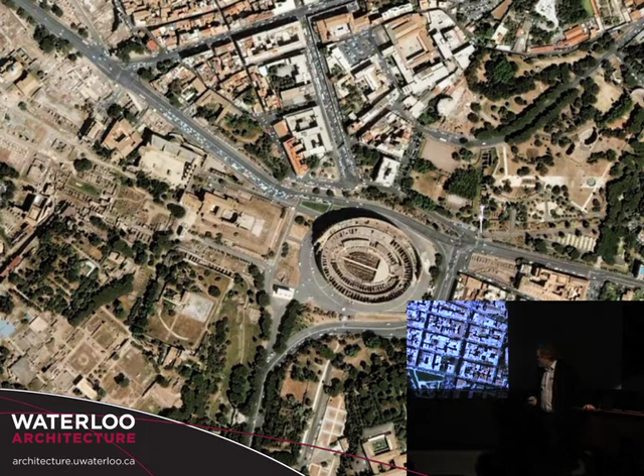Because my very first job was at Mathers and Haldenby, a now defunct firm which gave the genesis to the dean of the school, the director of the school, and it was one of the worst jobs I've had in my entire life. And I never wanted to work for a large practice again.

But 20 years ago, I found myself drawn to B&H through a series of sequences, and thought I'd be there for 3 months, and 20 years on, I'm still there. And Donald is right, I'm quite proud of the fact in some ways.

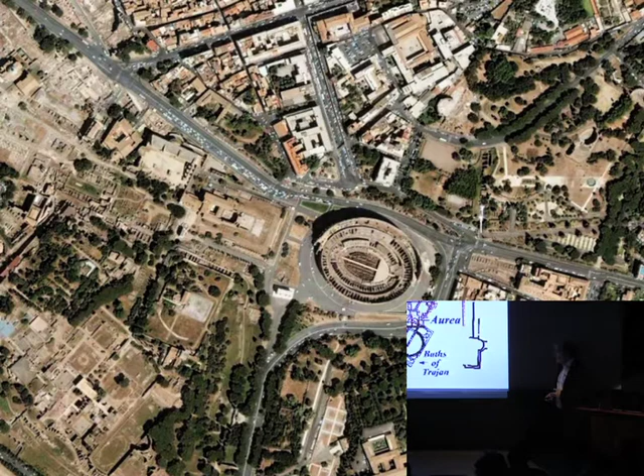And the reason for talking about Rome is that it was the first place where I kind of came to this weird understanding of the palimpsest of the modern city that dates back over 2,000 years.

Which one? You're okay? I think I'm okay.

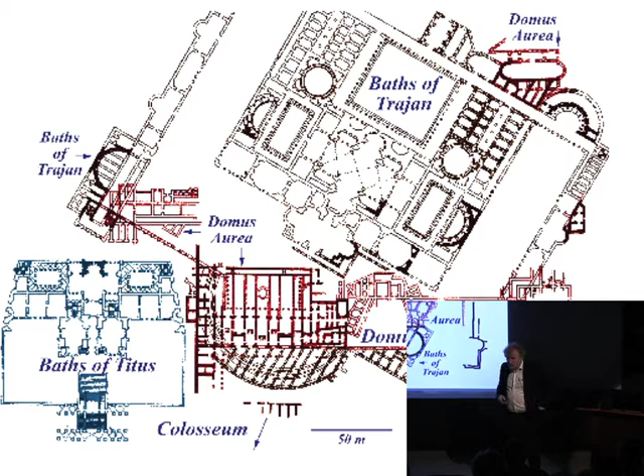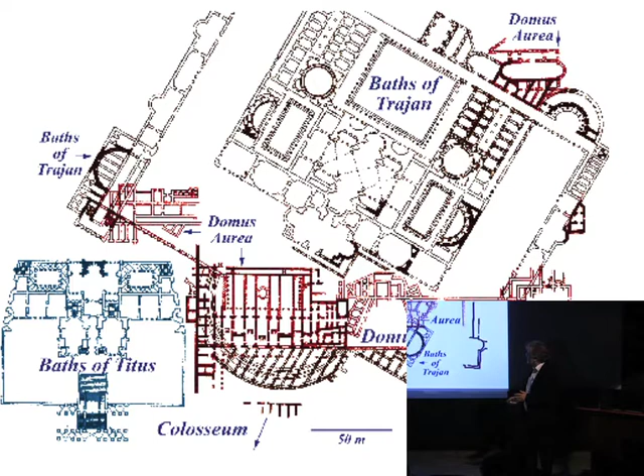Is that okay? Okay. And this is just the classic Domus Aurea, which I think is one of the great structures - the space itself is amazing and quite interesting, but to me the drawings of the thing are actually far more fundamental and interesting, and actually talk to the condition of the city.

As kind of a series of layers, and in this case layers of very, very large structures, beginning with the Domus Aurea, which was quite a bit larger than this whole thing, that 10 years after it's constructed is fully renovated and destroyed by Trajan, by a kind of marketplace that gets stuck on the top of it.

And I've always liked this drawing because it in fact is almost incomprehensible, but it shows the ability of architects to take a piece of structure, bury it fully underground, and then build the new program of construction on top of it by creating a brand new system of foundations that then the city gets instituted on up above that.

It was a perfect piece of Roman architecture, massive in its nature and its consistency of development. It was a seminal piece of structure at the time it was built, but then as time moves on, it gets completely consumed by the medieval city and taken over and becomes a refuge of the poor.

Fish markets get built into the base and around it, and it slowly sinks bit by bit into the layering of the city as it moves up.

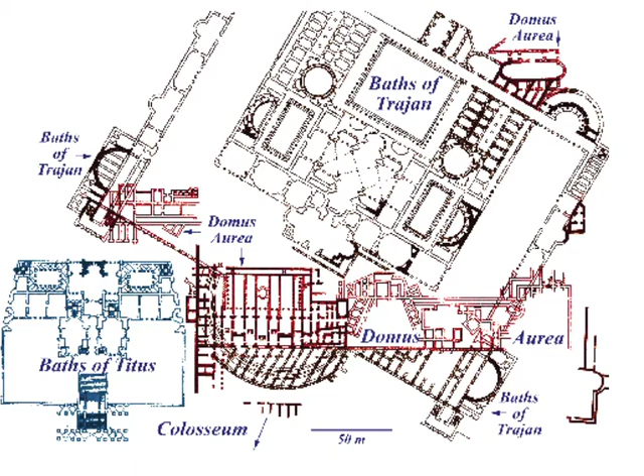Mussolini at some point tries to clean it up and turn it back into the kind of structure it is, but by that time it's already being completely consumed by the Barbarinis on one hand and then various apartments on the other. And then across the way at the Portico of Octavia, it's now consumed by a church, and the old city is almost a full level below grade.

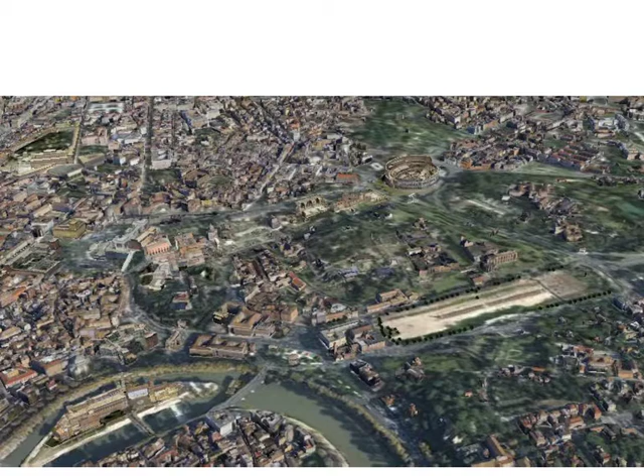But it just keeps on getting reinterpreted and redigested into the city. And in some ways, it simply can't go away.

So here it is in its genesis. Here it is now - it's basically become a hill town. The structure is still fully intact underneath this, with the city growing on top of it.

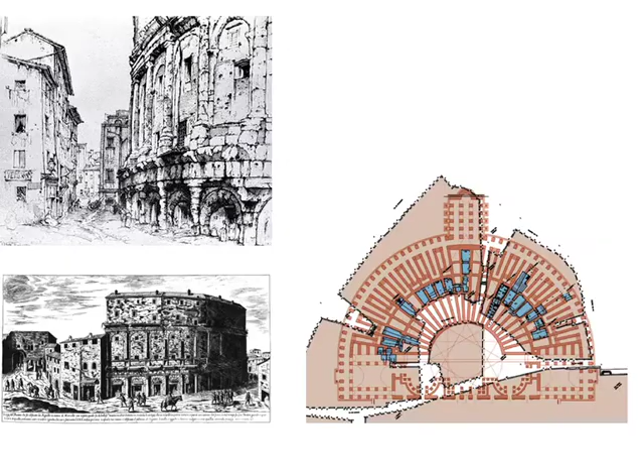And basically the landscape being reintegrated with that structure. For me, that's actually what the city is, and what gives me joy is walking around our city in Toronto and seeing these components that have been around for years. They keep getting reinterpreted, pulled apart, and put back together.

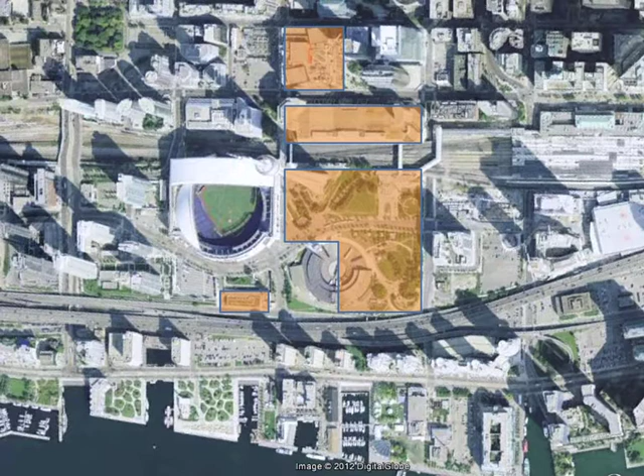But if we fast forward 10 years, we got involved with the Deep Lake Water Cooling project. This turns out to be one of those great pieces of infrastructure in the city that almost nobody knows about. It starts with the problem in Toronto of lousy drinking water, wanting to add capacity to the drinking water system.

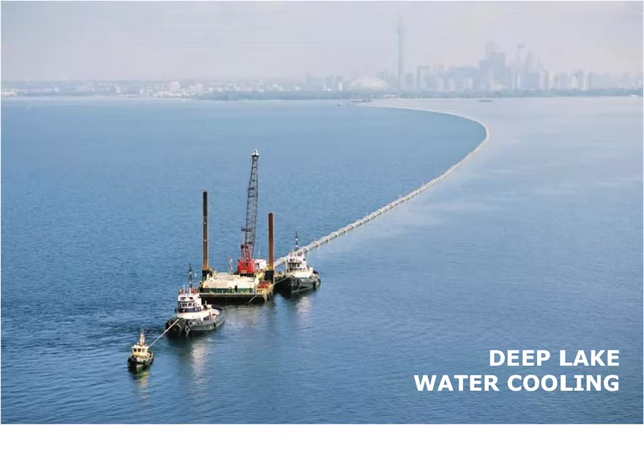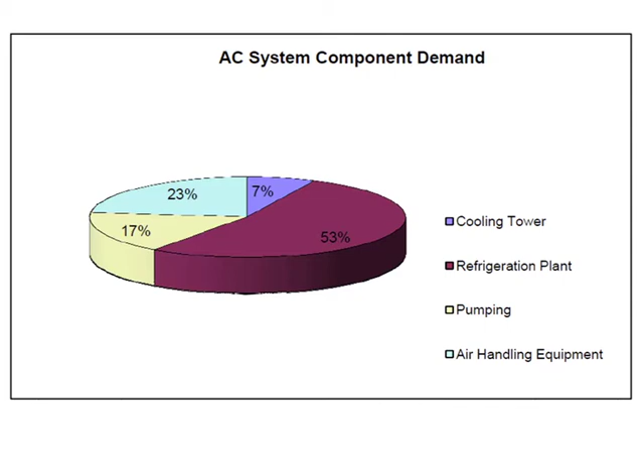At the same time, a group of engineers came along and said there's a real thing we can do here to reduce refrigeration plant energy loads in the downtown core of the city by taking this drinking water and sucking some of the energy out of it.

The project itself consists of three 4-kilometer lines that go out into the water. It hugs the base of the shoreline and goes fully out that 4 kilometers until it can reach water that doesn't stratify at the base of Lake Ontario. It stays at a consistent 4 degrees Celsius.

So you bring this water in, and it comes into the Toronto Island pumping station, filtration station, which itself is an old structure that's been there forever. It hadn't been used for some 25 years, but it's now being fully reinstated in the city with new machinery to filter that water.

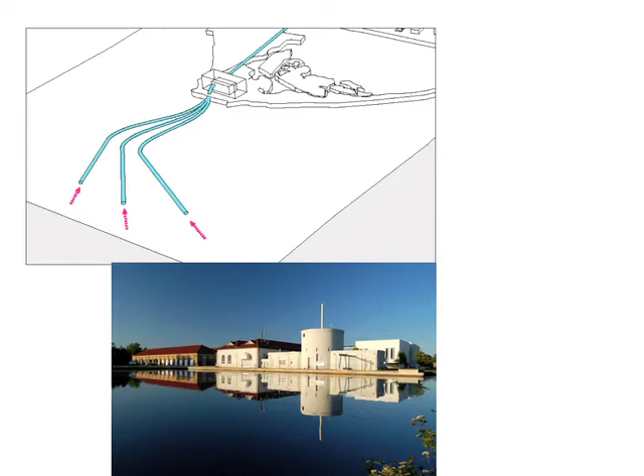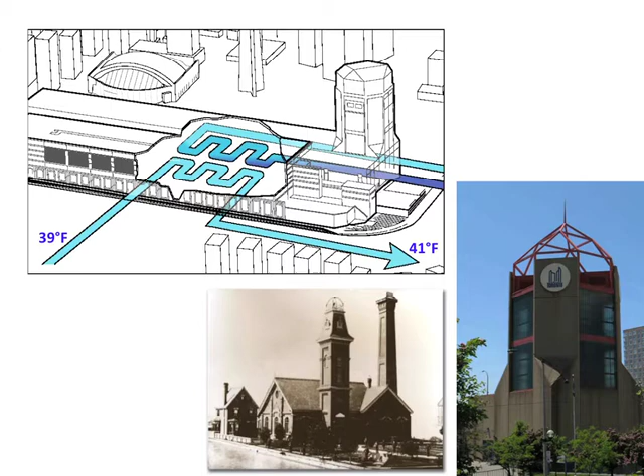That water comes into the John Street pumping station, which B plus H produced. This was the original structure that sat where Skydome was, and then this is the new facility.

Within that space, we bring in the water at 39 degrees and take out basically about 2 degrees off of that to generate almost 40,000 tons worth of cooling. Below this system, below grade, there's this massive room that you will never see.

No one's allowed to go in there because, of course, it's a strategic asset. There's this guy here - you can see he would stand about this high.

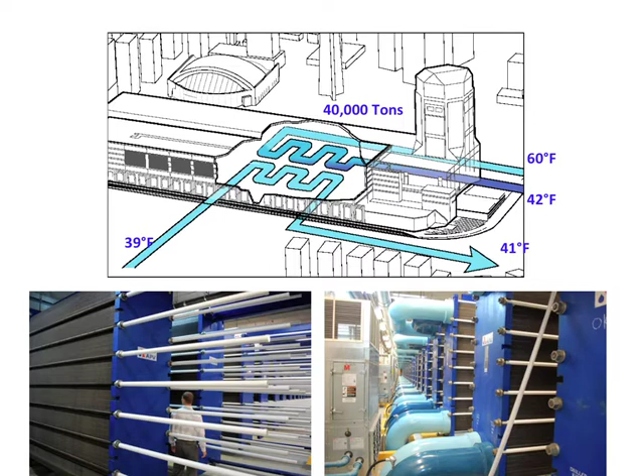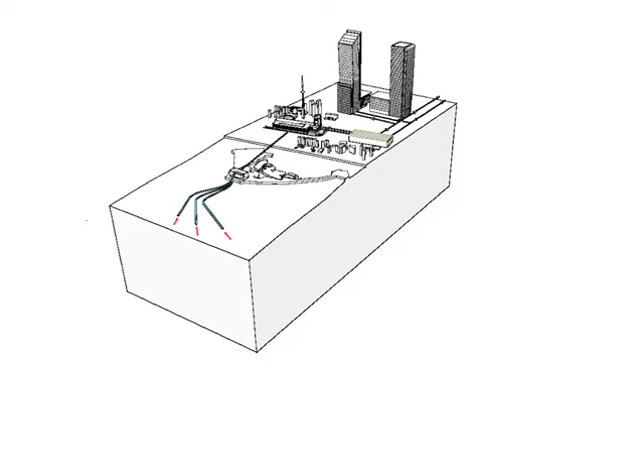All the drinking water for downtown Toronto comes through this system, and a piece of it gets knocked off to generate cooling. That then goes and sits in the cistern on the ramp for the Metro Toronto Convention Center, where it's combined with incoming coolant and pushed out to the rest of the city, uptown to the core and all the way up to Queen's Park, which you can see here.

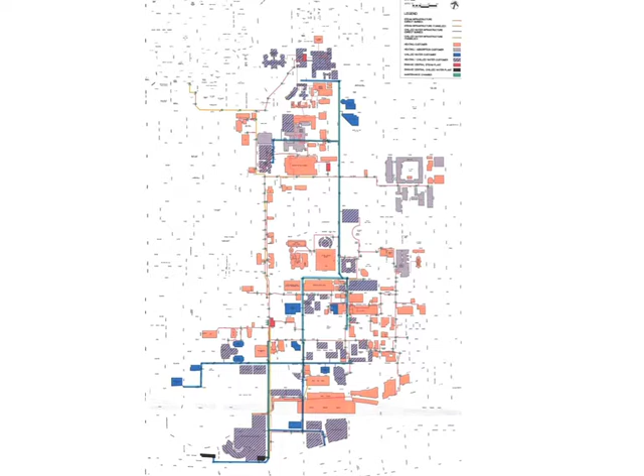So this is the kind of continuous system, and it has quite a number of buildings on it, in particular the TD Centre, which we've just put on there, and the Royal Bank Centre, which I'm going to talk about for a second.

To me, what's extraordinary about that is it's a massive system leveraging a component of the city, drinking water, to generate something sustainable, but it's not the way we typically think about sustainability, which is small and local. It's actually large and systemic.

It's also a thing that architects do and have to be part of, coordinating consultants and so on, which generally is completely unsung and kind of disappears into the background of our profession. So I'm just going to quickly talk about the RBC Centre as the first building in a kind of transformation of the office building in the core.

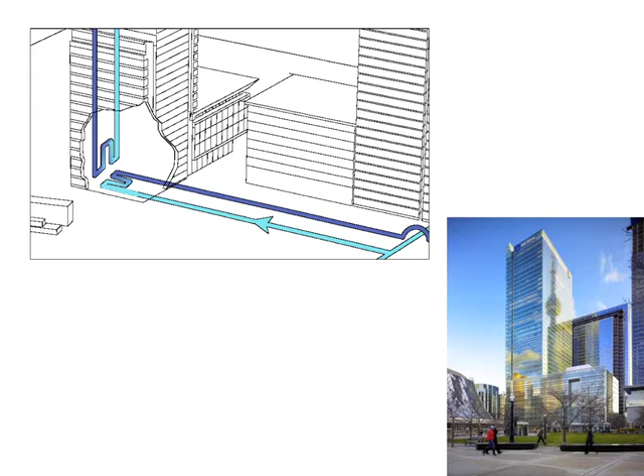So the Enwave system runs coolant into the RBC Centre, which is the largest LEED Gold certified building in Canada right now, and we'll talk about that in a moment. It has all the classic components. By the way, this was developed with Dermot Sweeny, who has a sustainability practice for working on these projects.

It combines several intense sustainable components, including displacement ventilation, which uses natural convection currents from equipment and people to drive fresh air up towards the ceiling so it can be drawn off at the top, meaning the air is much cleaner instead of trying to push dirty air down. Also light shelves, high quality glazing systems, perimeter heating, and so on.

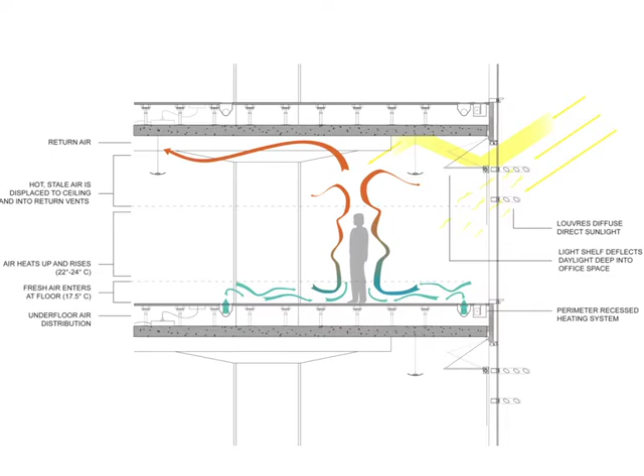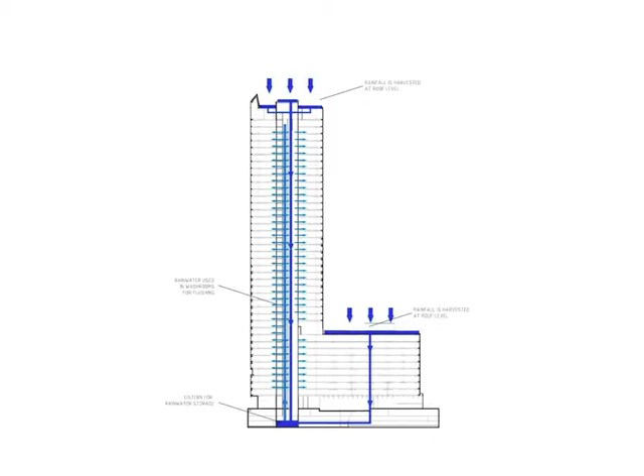It harvests rainwater so that all the lower 10 floors are fully flushed by rainwater, sequestered on these two rooftops, as well as using that water for irrigation systems. And then, of course, the chilling system from the Enwave plant reduces the energy load significantly for this building.

So this is the section we developed for the building, with sunshades that reduce direct solar glare, automated roller blinds and light shelves that drive daylight further into the space, and indirect lighting on the ceiling and exposed concrete systems.

Now, what's interesting about this to me - it's LEED Gold and so on, but in some ways it just shows how far we are from being a sustainable environment, in that it's floor-to-ceiling glass on all four elevations. So in some ways it's kind of bogus.

Nonetheless, this is how marketing goes, and there was no point in even having an argument about putting more solid wall into this - this is simply what they wanted.

And the LEED Gold designation - the building does unquestionably use much less energy than an equivalent building without sustainable strategies, uses much less water, et cetera. It's doing its job, but in terms of going the next step, it's certainly a long way from it.

And I think we're going to see another few floor-to-ceiling glass buildings in Toronto, and then it's going to be mandated out, legislated out as a solution.

One of the biggest problems they have with this project is simply that lawyers come in to rent the space and say, 'We love the view, we just love the view, but I really want a wood coffered ceiling.' So anyway, these are the things you have to deal with in these spaces.

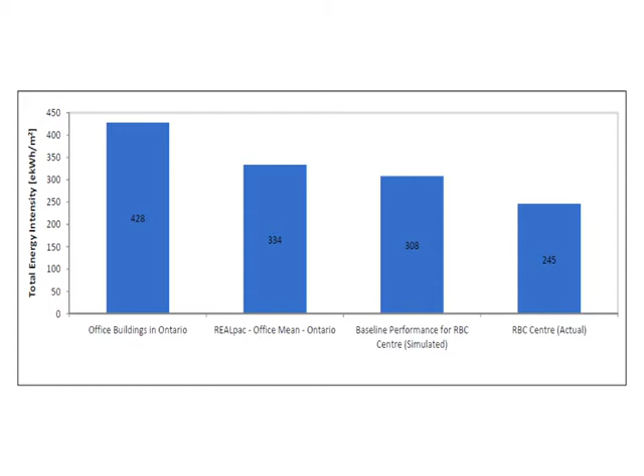I'm just going to flick past this, but the interesting thing about this building is that we try to model all of our energy use on our buildings, and this is the baseline performance in the simulation at 308 equivalent kilowatt hours per square metre - and it's actually performing at 245, so it's working incredibly well. But what it's done is set the standard in the city now for what an office building should be.

So now we have the Price Waterhouse Tower that's come on stream, TELUS has come on stream, and Oxford's about to build a platinum rated building in downtown Toronto.

So it now becomes the marketing tool: it's got to be LEED certified, which means the rest of downtown, including First Canadian Place and Toronto Dominion, need to up their game to meet that requirement. Toronto has no history of retrofitting buildings, really. So for us, when we started down this avenue, we started thinking about other areas where you can see these kinds of retrofits going on.

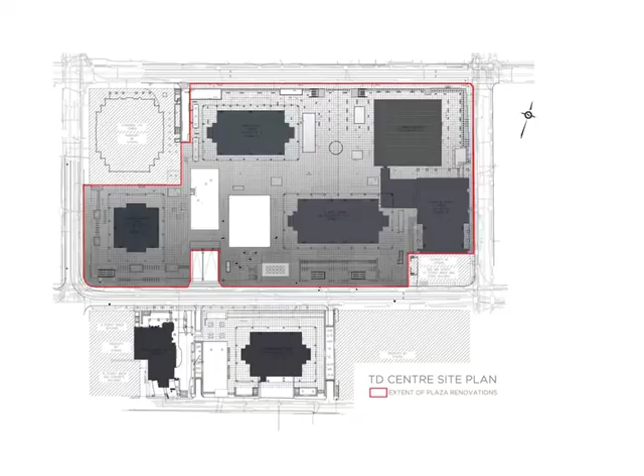And then we have 2 other towers built alongside it of varying degrees of quality. This one is the 3rd tower that was built—we'll talk about that in a second. But the biggest architectural expression of the building is the exposed structure on the outside, which isn't actually structural, but the expression of that structure, and the floor-to-ceiling glass running up the building with the bronze tint to it.

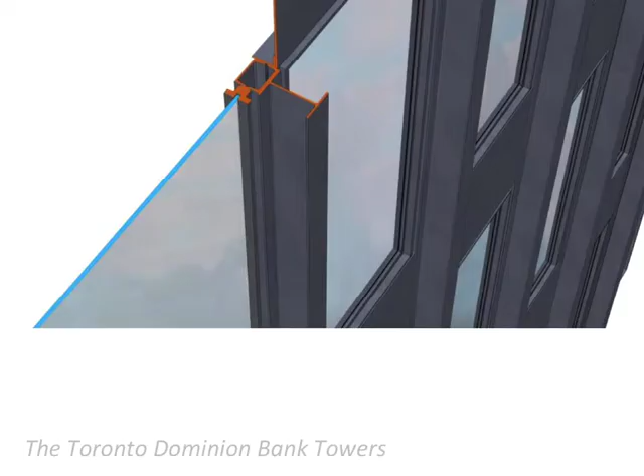Now, the color is really off here, but you can see the structure's gotten quite run down—all the sealants are popping out of it. This color is supposed to be jet black, and so although we still look at the building and see it as black, it's actually battleship gray. It has this amazingly crazy notion about how to build, and it brings for me the sense of how confident we were in our time. This was the most extraordinary technology of its time, and everybody thought it was going to last forever, et cetera.

But it's single glazed. This is steel bar stock for the window stops. These are two steel channels stuck together, and then a steel I-beam section stuck on the outside of that—this is outside, this is inside. So it's basically like a perfect radiator; it just sucks the energy out, whether it's cold coming in or heat going out. There's no insulation whatsoever in the system—there's a teensy-weensy bit in the spandrel panel, but otherwise it's basically like sitting outside.

So we face this dilemma that at some point Cadillac decided to transform the building, as pieces of this were slowly rotting out and rusting out, and it just came time to deal with it. In this case, the architect's job is to be non-existent, to do something where nobody sees it, including the tenants inside the building, so that somehow it gets transformed and at the end everybody goes, oh, it's a Mies building.

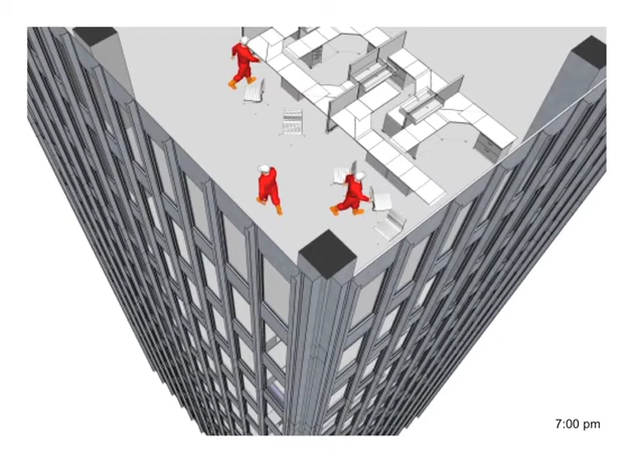It begins with a whole program of dealing with lawyers and so on, so that at 7 p.m. they pack up their stuff in boxes. The guys come in and move everything away from the window, one bay at a time, bring down the swing stage, and this poor guy has to be on the outside digging gaskets out of the building and grinding pieces off. The glass gets removed to the elevator from the inside, then brought in and replaced. The furniture goes back at 7 a.m., and happy people return having noticed nothing changed except for better windows and no induction units.

And it sort of worked that way - amazingly enough, there were only about 17 floors unoccupied in the building at a time. So here you can see the opening in the window and the guys working up on the platform.

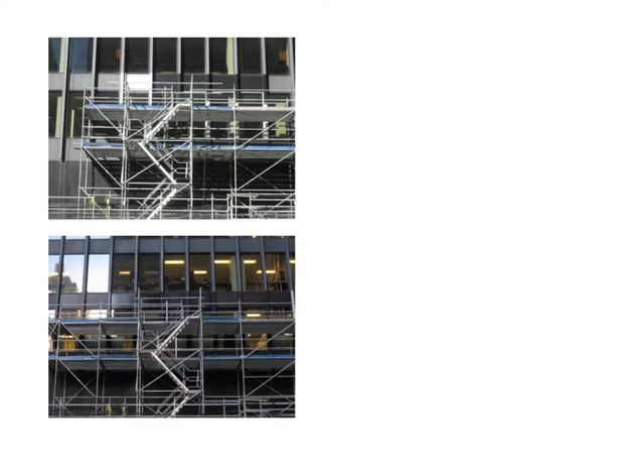And then we had to develop this - you can see here the gray existing paint, and these are new programs for studying the repainting of things. The building is painted with this lead-based paint, which is just fantastic stuff. They used to use it on bridges. Technically it doesn't really dry, but it's as toxic as it comes - extremely toxic. So it's technically illegal to use now.

And so the final result is floor-to-ceiling glass, in terms of the effect to the client. Now it's actually fully competitive with the RBC tower, and it's a building that was built in 1969. Its energy load is not quite as good as RBC, but it's right up there, and it's now rated a LEED Gold EBOM building. So it's actually being transformed dramatically from its former space to what it is now.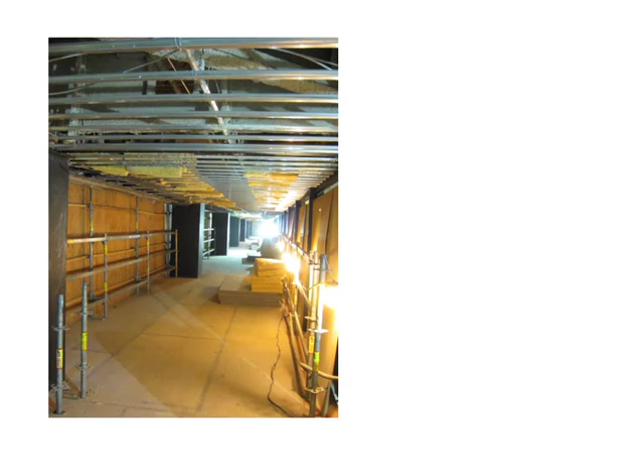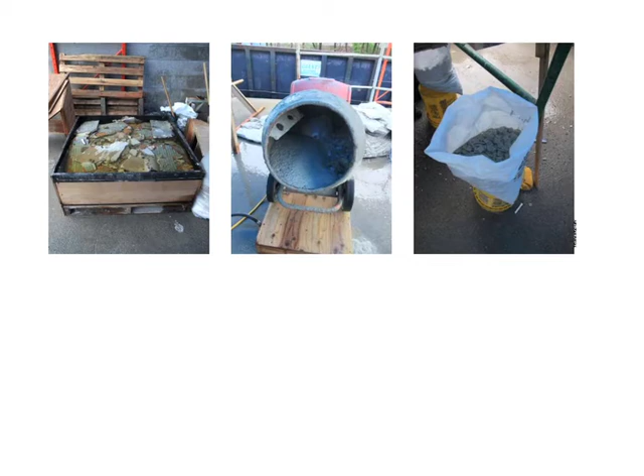We removed all of the mosaic tile from the ceiling, which was damaged in spots. Then we took all that mosaic tile and tore it apart into individual pieces so we could tumble it. This was all done on site. Tumbling cleans all the material off of it—you can see it here before it's tumbled—and then we create new panels by mixing in about 20% new glass tiles.

We couldn't replace the Mies tile with the original—it didn't exist any longer—so we mixed in another 20% of tile. Again, this was all done on site and replaced in the ceiling. We also removed all the various junky programs that got put in over the years and replaced the grills and so on, so it's very crisp now.

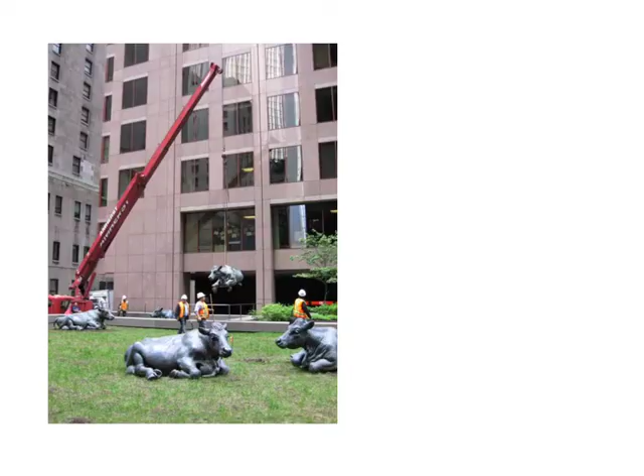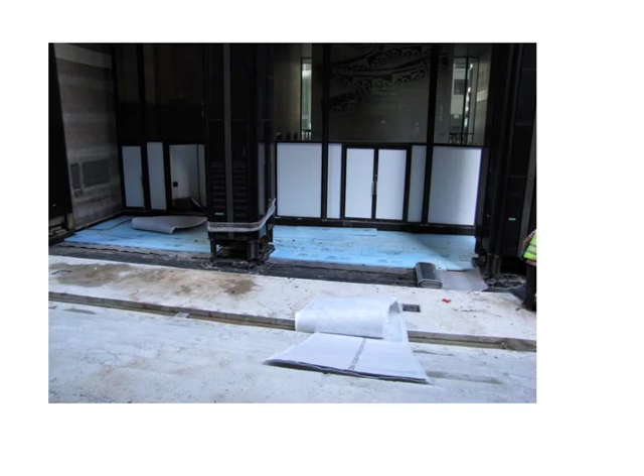It's also energy efficient. The program included tearing apart the plaza—removing the cows, ripping everything up. This was completely uninsulated, so we got in there and replaced it all with modern waterproofing, then new insulation, then a new tile surface on top of that.

That also helps because the whole underground layer of this building is entirely a shopping mall, so it improves again the energy performance of the mall.

As a kind of finale, Cadillac Fairview asked us to look at turning this into a green roof. It's funny because every developer needs a symbol of sustainability, and the common symbol is photovoltaics, which are total nonsense in that they only work if you have a lot of input, like tariffs put into them, and they just don't deliver the energy.

If you took all the millions of dollars spent on photovoltaics and spent it on your envelope instead, you'd have real, direct benefit for your building. But your envelope isn't sexy, while photovoltaics look great to stand in front of—they're purple and terrific. This is a standard thing in my practice: everybody wants photovoltaics in their building. You'll see in a second, we had to do a whole study on putting photovoltaics on the facade of a white icon in downtown Toronto, First Canadian Place.

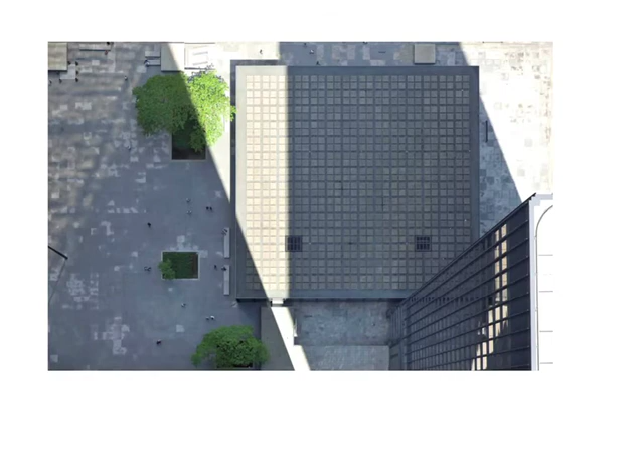But green roofs are something everybody can see, so we did this study for putting a green roof on top of the banking pavilion. It starts with a multicolored thing, which many of us in the office found appalling, but you have to go through these things. Fortunately, there isn't enough sunlight here to promote colored flowers, so we ended up with a type of palletized grass, not sedum, and that program is now finished.

This is still a rendering, but it basically looks like this. It's the only thing that kind of breaks with the Mies tradition of something actually growing on your building, but anyhow, it seems to be working.

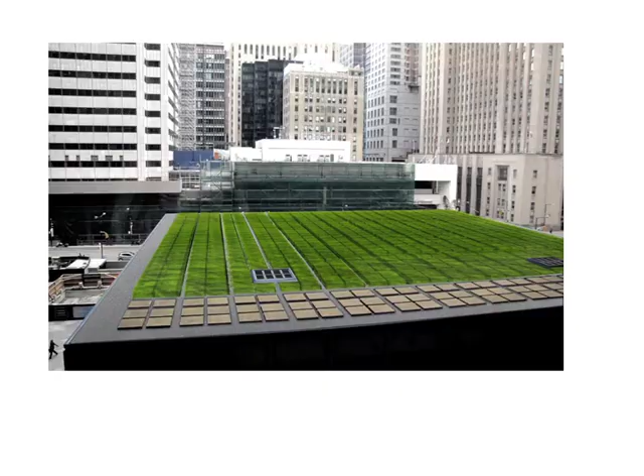I think this is the perfect idea of a place where you don't want to mess with it—it's got to be perfect in its reconstitution, regeneration and transformation, bringing it back into its relationship to the city and making it competitive in the marketplace. Weirdly, even though this place is listed, Cadillac often talks about tearing it down and building something in its place, so it's important that we keep these structures interpreted and germane. Otherwise, they tend to disappear.

At the same time, we had the great good fortune of working across the street, and this is sort of an interesting photograph.

It's an old image of downtown Toronto. This is one of the first large buildings B+H did, and we've been working on these structures since 1969, or 67. Across the street, we started work on First Canadian Place in 1973. It opened around 76, 77, and it's been a lifelong relationship with the building as it's been bought and sold by various developers. We've been working on it ever since. It's 2 million square feet of legacy for us, and we've had a love-hate affair with the building since it was built.

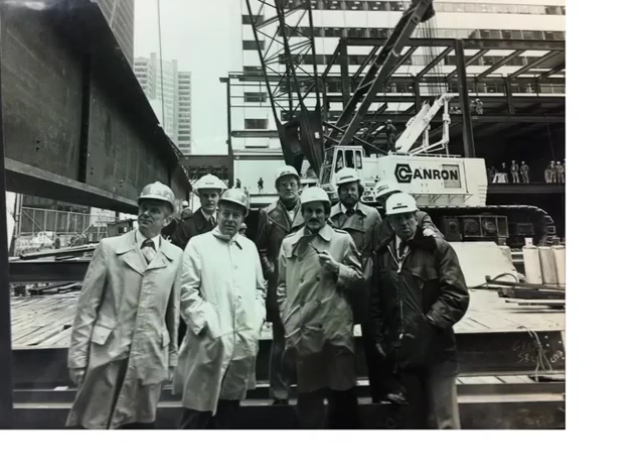You can see here that everything white on the building is in fact steel, and it was clad top to bottom in Carrara marble imported from Italy. The marble panels are 1 3/4 inches thick. I want to point out this bit of legacy - this is Tony Alcazar, a senior partner in our office who's now 75 and still works in the office, putting up the last piece. Look at all these boys with their pipes and so on.

I keep saying we, but it actually is we - Liz and I - and these things require huge teams that do the analysis on these buildings and so on.

This team was called in to work on the building because one of the panels, a number of years ago, fell off the building and dropped 40 stories to the podium below, thankfully. It exploded, sending marble all over the place along with gravel from the roof. All the streets surrounding it were closed while people figured out what had happened.

What had happened was that the entire thing had gotten old and musty, and we had this process taking effect called hydrothermal hysteresis, wherein the marble, which is porous and absorbs water, has its front face dry out while its back face doesn't, so it starts cupping. It's just like a wood floor in a basement - it develops a memory and doesn't go back. Over the years it gets slightly worse, until in some cases we had bending out of plane of almost an inch, which in a 1 3/4 inch material is extraordinary, putting incredible stress on the pintles and connection systems.

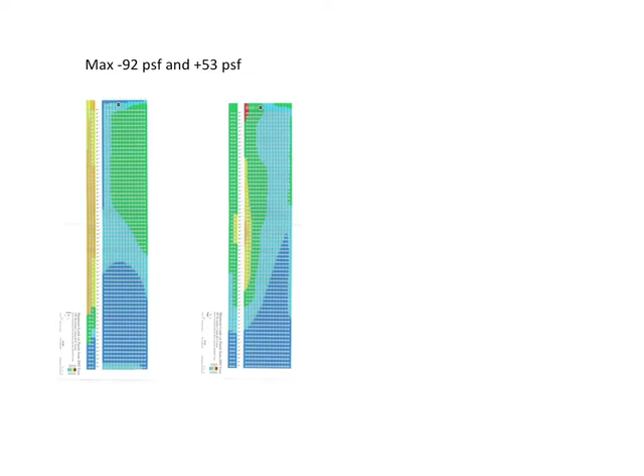I want to show this diagram from the late 70s showing wind loads on the building. Back then the effect of wind loads on buildings was poorly understood, but you can see the hot spot here - this is where the major wind loading occurs, at the top of the building. As the city gets built around this tower, we had to do a new wind study to see what was going on, and it changes the velocities dramatically around the building.

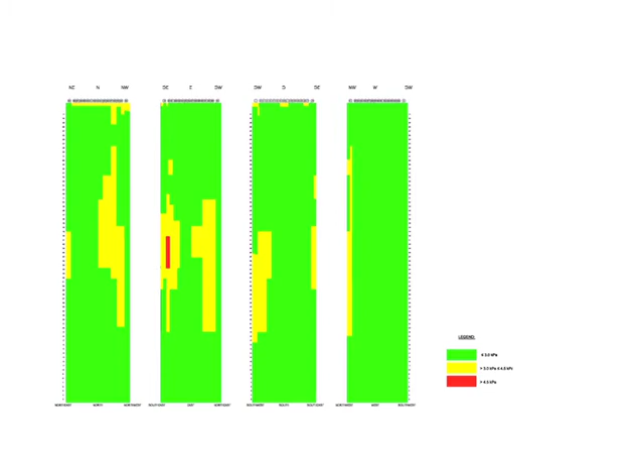It starts creating kind of Venturi effects between the towers, and the highest speed wind velocities start up here and drop down to here, and you get this phenomenon called vortex shedding, where the wind peels away from the corners. This is exactly where the panel fell off of the building, so the model actually predicted this would happen. When we went to redo all the cladding, we reinforced all these areas in yellow to deal with higher loads from the increased density around the building.

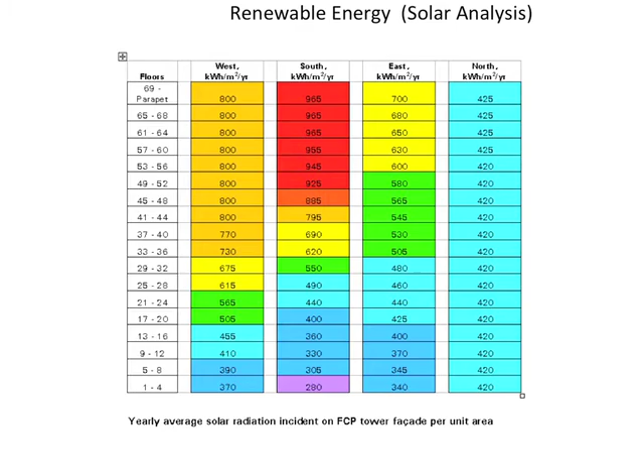As part of the study, we looked at methodologies of construction, because in this case everything had to be done on the outside of the building, as opposed to the TD from the inside. This is the Aon building in Chicago, also an Edward Durell Stone building, which started failing about 7 years after it opened, and they had to reclad it all from the outside. The pieces of marble were raining on the streets below, and they had to close most of the streets before they started this process.

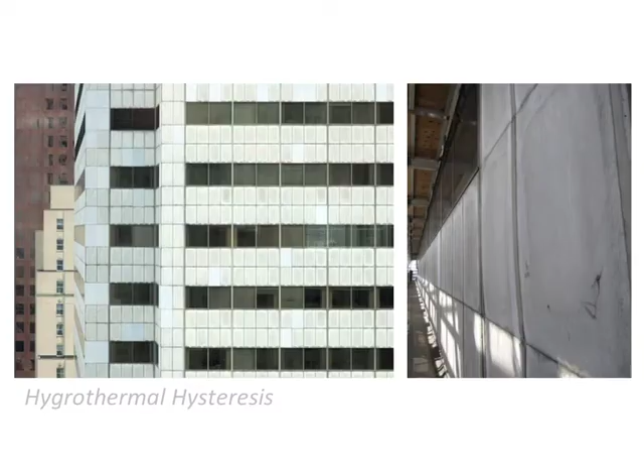Taking all that information and understanding what we had to do technically in terms of reinforcing the facade, we then looked at what the new suit is, which is the design exercise for the project. This is just showing up close the marble situation.

The existing building has panels at every 10 feet, 10 feet by about 8 feet, divided in 4. So each panel is 2 feet 5 inches by 4 feet by 1.75 inch marble, so you can imagine a very heavy object.

You can see all of the sealants leaching into that marble, in particular where the pintles are at the base, where you've got water wicking out at the bottom of the system and bringing old silicone out to the surface and wicking back into the marble. Here you can see the problems of the thing bent out of plane.

The first thing that happened after the piece fell off is they put these rubber bands that ran all the way up the building, embedded in silicone, to try and keep everything intact so things wouldn't fall off. So the building was looking really ugly, kind of like a university student's basement apartment shower or something.

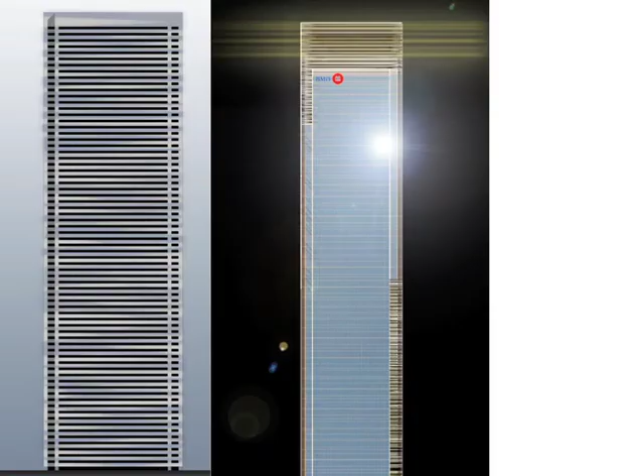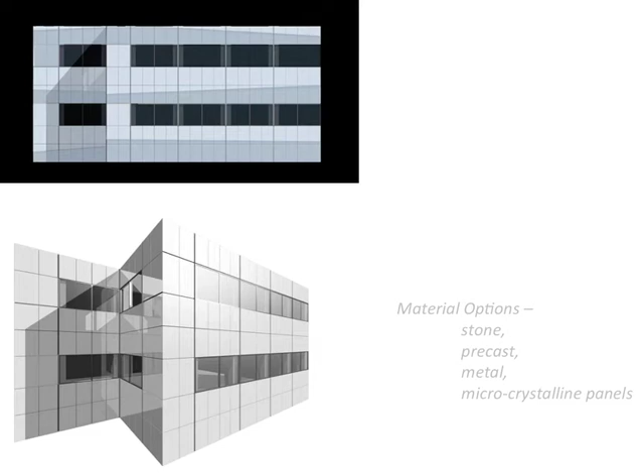As part of the study, we looked at piles of different ideas about how to deal with the facade, from full recladding, reoccupying the corners, putting office space into the corners, to recladding with various materials. Maybe it just stays white. Can we do something with different material options: stone, precast, metal, microcrystalline panels, or frit patterns into the glass that change the apparent angularity of the building and hype up the form. Could it be blue? Could it be zebra?

These are the sort of exercises you have to go through, in particular with clients who are so nervous about the amount of money they're spending, and the question of how are they going to know it's new if you just make it white. This is a question that comes up over and over again.

Ultimately, what we decided was that it was really important that the building stay white. That's the icon, that's the place it occupies in the city - the white tower, the black tower - it can't be any other color than white. So how do you transform it but give it a new aspect, new character, and amp up its sustainable components?

So this is the final constitution of the building, with a slight adjustment to the crown on top, keeping the building white, but now replacing the marble with glass all the way up. But then taking the corners—and it's funny, because I never liked the corners, even as a kid before I was an architect, I always thought they were kind of ugly and dumpy. So we got the opportunity to take these and almost make them more like 4 panels attached to the tower, instead of a homogeneous cruciform envelope. So we made the corners of bronze glass in that case.

So here's the assembly as it existed, with its 8 panels of marble and existing strips of windows, which we kept. The glazing was actually in very good shape, and over the years about 25 to 30% of it has been replaced anyhow, as it aged, or broke, or the seals broke in the system.

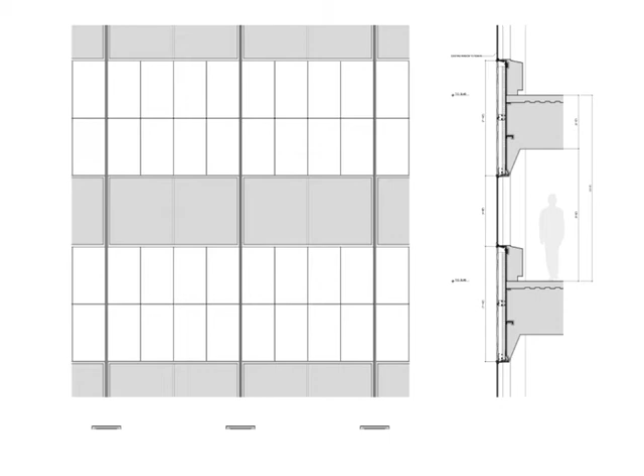So we went with this idea of replacing all the stone with a panel of glass that's about 8 feet by 10 feet—just to put it in context, it's a huge piece of glass, almost the size of this image. And then to replace all of the curtain track as well, and all of the seals and gaskets and the flashing.

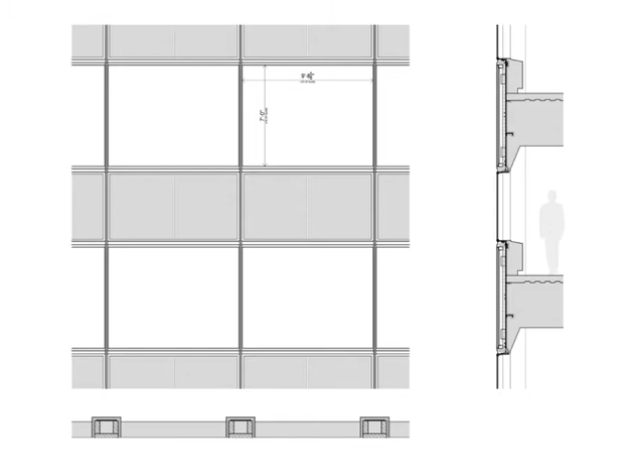So this is the kind of final decision about how it should look. We have the glass panels, the darkened bronze corner, and then the issue becomes how to actually make that happen.

So you can see here, it's very subtle, but we made this decision to create some texture on the surface of the building by taking the technology of glass. From a structural point of view, we ended up laminating 3 layers of quarter-inch glass into the system. Then we decided to put a frit pattern into what's referred to as layer 2, or surface 2, and an opacifier at surface 5. So you have about a quarter inch of depth there to create some shadow in that plane.

And once we decided that, it got into this thing—this is one of the mock-ups, and you can see that effect, the shadow line that starts to get created within that depth of about a quarter of an inch on the building. It's very subtle. But then it became issues of how to construct that.

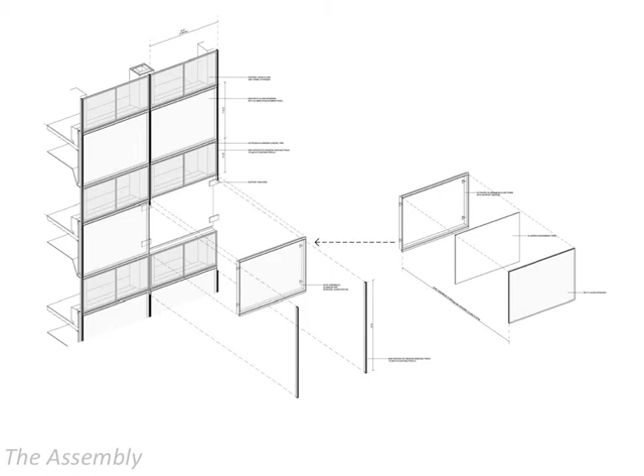So you can see here, that's the idea of how you take apart the panel—just put 2 gravity anchors on the top and lateral on the bottom, and you'll see how that works in a second. And then this layer of three layers of glass onto a metal frame. That's the kind of system there, and we'll talk about that a little more in a second.

But then we got into this thing of what that frit pattern should look like. Since we now have like 6 surfaces to play with, we started fooling around with what you could do in those 3 layers and that depth. One of the things we thought was: what would happen if you had 2 layers of frit, put them against each other, and started rotating them—which gets you into these moire patterns, which you can twist and turn and stop at whatever point you want.

But at some point that became kind of arbitrary, so we thought we'd go back and look at the work of Edward Durell Stone, in particular the way he did these screens and so on, and then settled on this idea of how he did the screens later in life, where they were more triangular patterns he used in several of his works.

So then we started working with the triangular patterns, and this was actually when the job was fun—we gave out kits to all of our clients with 2 layers of these frit patterns that they sat there and rotated. It's great to see guys in suits do these things.

At some point it all becomes a little too fussy, so we settled on the idea that it should just be a simple triangular pattern, but with a kind of depth to it. So this is the final idea for that piece.

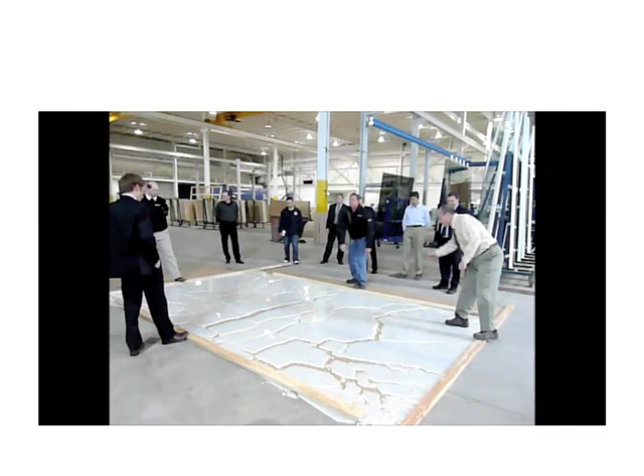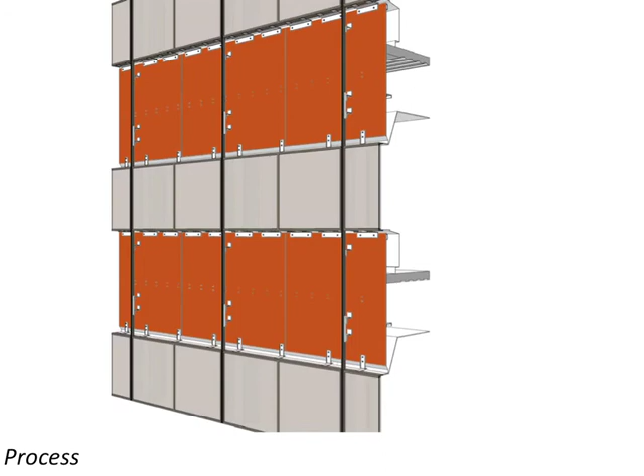All that said, this thing is going on with balconies in downtown Toronto. The weird thing is they performed exactly the way they were supposed to, but now everybody's scared of balconies with glass. Now they're saying they're going to laminate the glass, so you've got sheets of this stuff all broken up like this, but attached to a chunk of plastic. So it's a question of what's better - a chunk of plastic and glass falling on you, or a little piece of glass. That's a whole other debate.

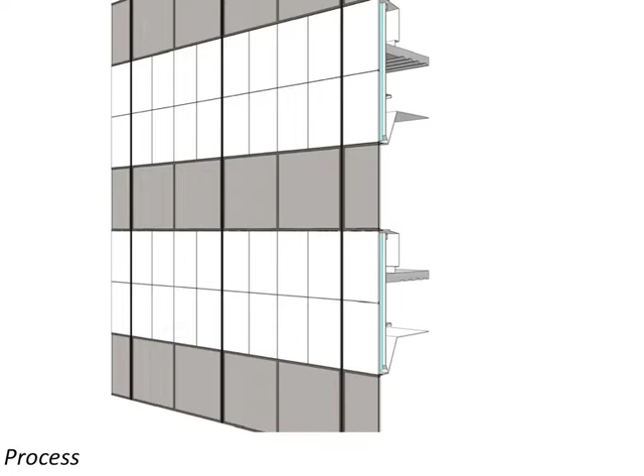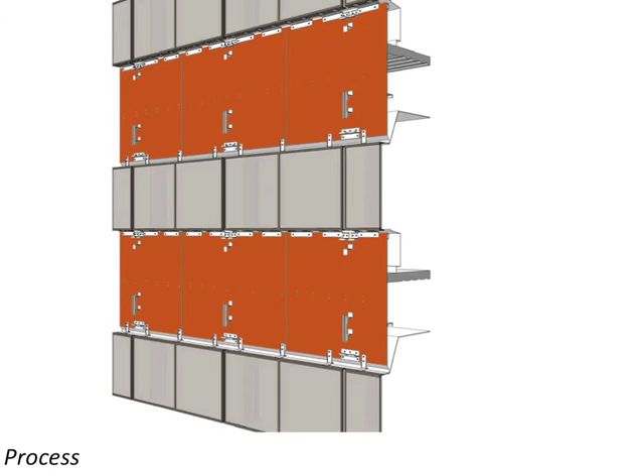So this is the process. We start with the system, remove the stone, remove all the insulation that's in there, burn off all the clips that support that stone, and remove the window washing track, then reinstitute new clips for the window washing track, new insulation - and one thing missing here is to go back and caulk all these pieces, replace anything damaged, replace all the flashings, etc., replace the insulation. The new panels come in, new trim goes on, and it's finished.

That all looks very simple, but of course that's just the design. What was interesting for us, and quite rare for an architect to be involved in, is that the whole process had to happen on the outside of the building. So we were directly involved with the logistics of construction, which architects usually run away from for liability issues. But in this case, the climber had to be fully integrated with the design.

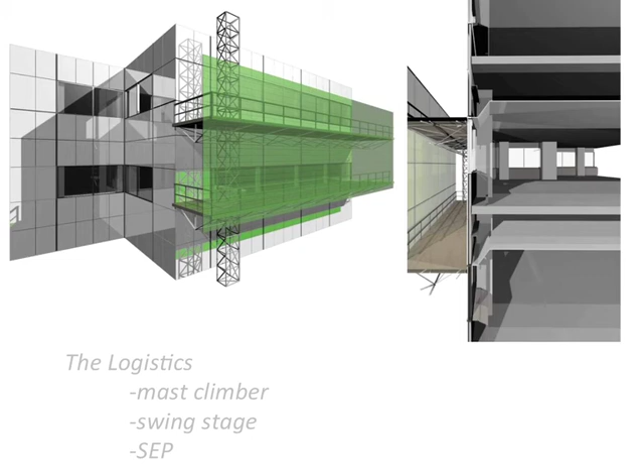As it moved down the building, it had to be clipped into the building, then unclipped, then clipped in again and unclipped. So we had the opportunity to work directly with a group out of New York who built the system, and to integrate it into the assembly for the building.

It starts with three layers of structure. On the top layer is where the glass is put in. The middle layer is the structure for attaching it to the building. The lower layer is for remediation, removal of the stone. Each truss relates to the column and the 10-foot module of the structure, and it has skates on the top and bottom, which I'll show in a moment, that integrate into that window washing track - that's where the system is hoisted up and down.

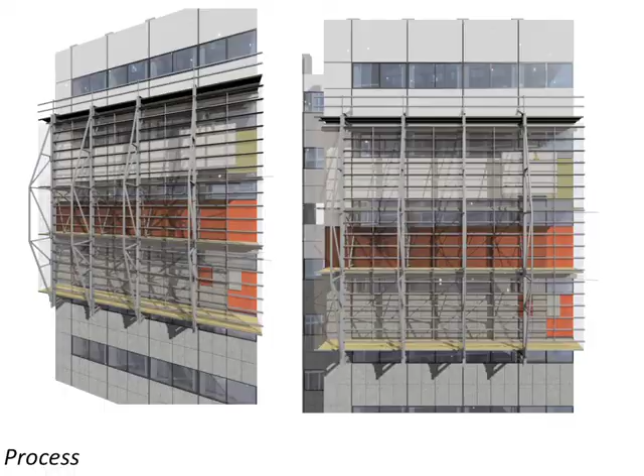In fact, what happens is we have 57 winches on the roof. That's the track, the skate goes in here and here - that's the structural component, structural level, glass platform and stone platform. So the platform is lowered a floor with the winches. The cable runs down in the window washing track and connects in there, and then it's lowered down, with nobody on the platform when it's lowered.

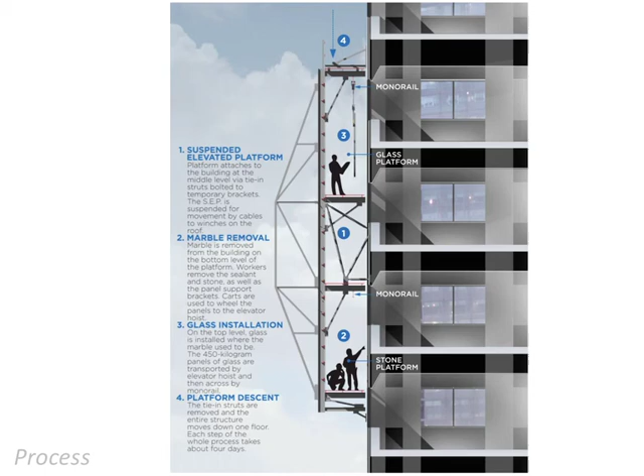And then it's bolted into the steel assembly, and at that point people can come back onto the platform and move things around. So no weight is borne on the winches - it's actually on the structure of the building. So it's an incredibly safe platform and allows for a huge amount of movement of large material.

This is actually interesting to me - this is an architect's drawing. It looks a bit like a shop drawing, but this is our interpretation of the structural system, how it's going to bolt into the assembly, how the skate attaches in, and how it's going to work on its way down. It's interpreted into a shop drawing.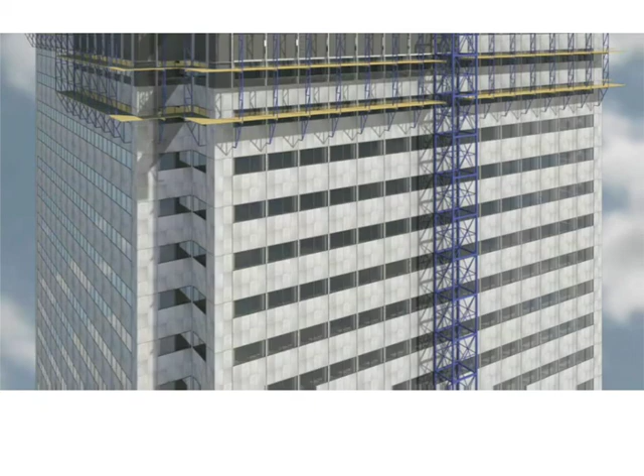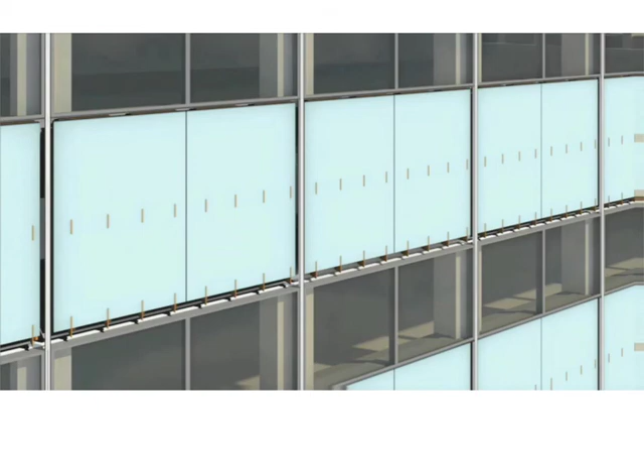So this is assembly, it's coming down. It moves into place, remediation happens on the lower level, and then the new glass is installed. This is just a view of the process: remove the stone, remove the insulation, cut off all the existing hangers.

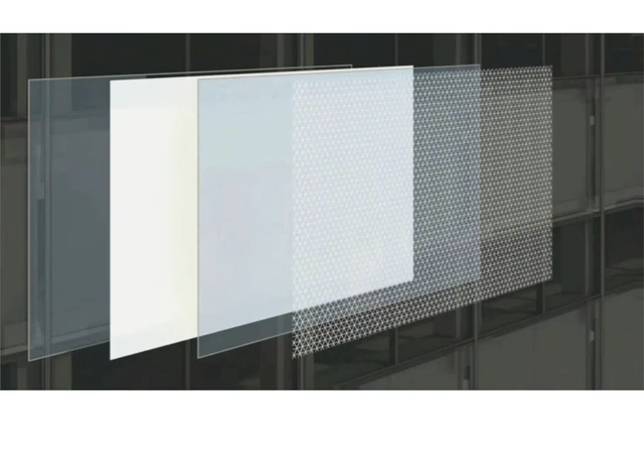New insulation, new Blueskin, new hangers. And then this is the glass assembly, which starts with a clear glass, an opacifier, another sheet of clear glass, the frit pattern, which is burnt into surface 2, and the outside pane of glass. Lovely sandwich. Away we go.

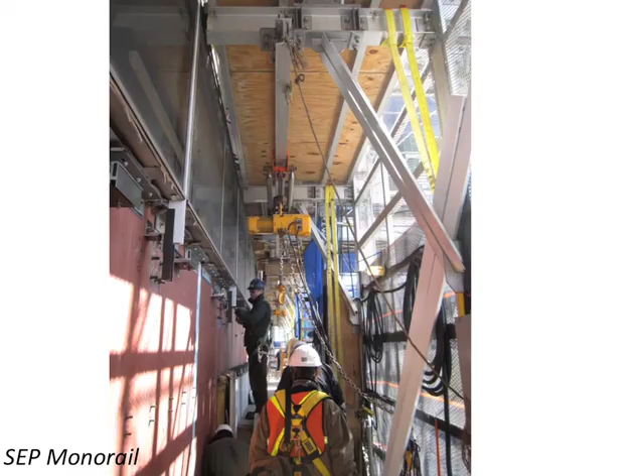So this is the thing in practice, and so we start. This is the upper level of the system, showing just the monorail, which runs on both levels. We'll talk about the rest of the cone in a second, but you can see the new extruded window washing track on the left.

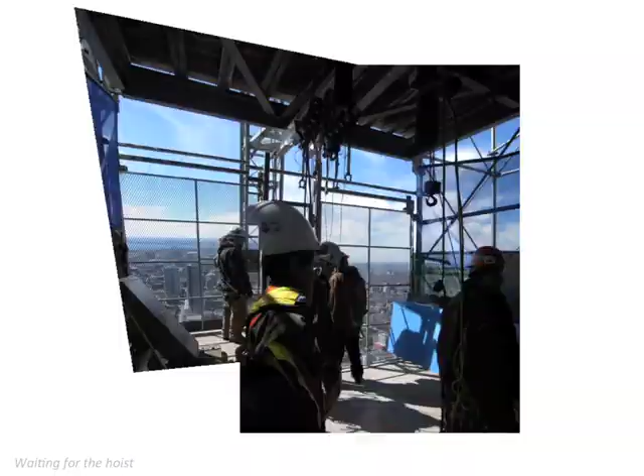So we start with the elevator. The elevators are all tied to wind speed indicators, so they stop automatically. We have a monorail track for pulling the glass on and off the platform. Here you can see the outside truss system from the elevator.

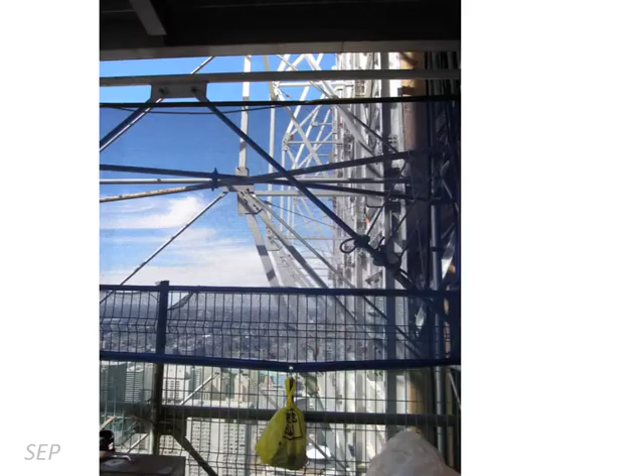It's like, there's construction for you. Anyway, we found the guy who was about 75 who had worked on the site. He ran the crew, and we found him and asked him about it. He said, 'Oh yeah, we put that up there,' so we gave the piece of stone to him. It's kind of a fun thing.

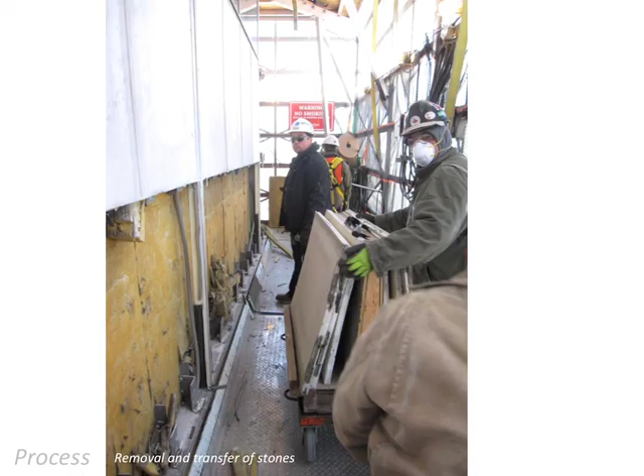So here's the process: removing the stone, putting it on carts, and off it goes. This, again, is a process I was always intrigued by—as we moved along, you can see that's the pintle there, and there. That's all it's held on with.

And here you can see the assemblies there, and you can't quite see it, but there's a kerf that's knocked out here and here. But that kerf is attached to these sort of T-plates here. At first we had a system where you cut away at it, and then you got a grinder and ground it off.

But these guys were all so into it that slowly the process got faster and faster, and they started designing their own tools. A guy showed up one day on the site with this kind of cat's paw system, and you could see clearly where the pintles were from the staining on the marble. You just take this thing and go like that, smack, and they could remove each panel in something like 3 minutes by the time they got to the bottom.

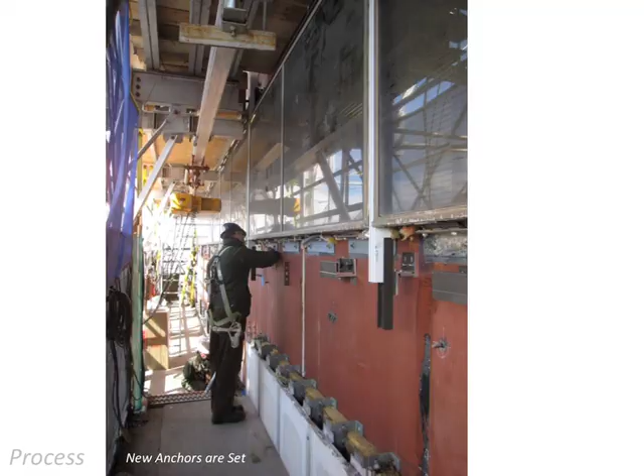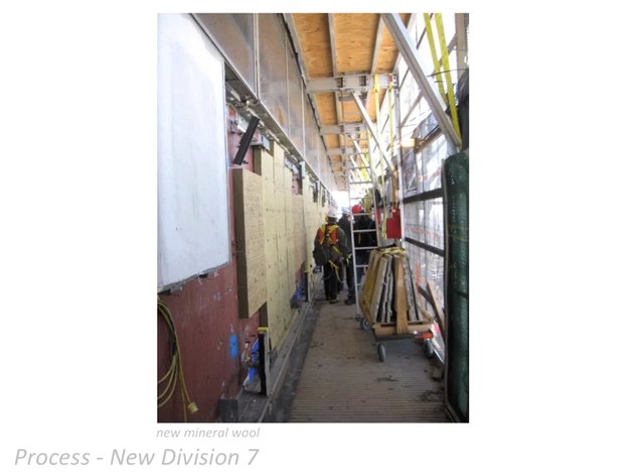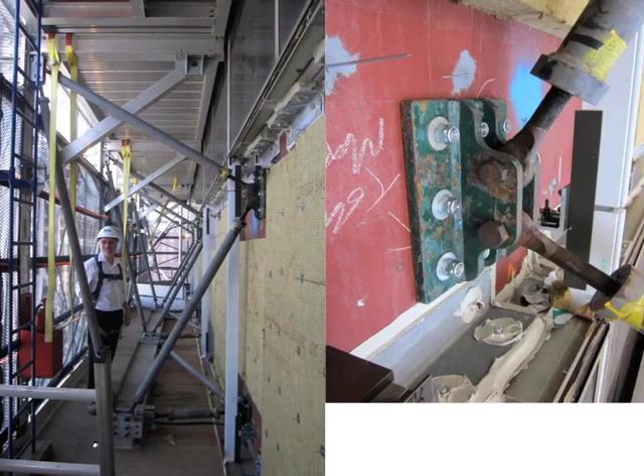So here's the remediation of all those components underneath the windows, and then new insulation being put on, but you can see the kind of blue skinning patching in various places. Welding on the studs for the bolt plates, and then here these are the plates that the structure gets attached to at that point.

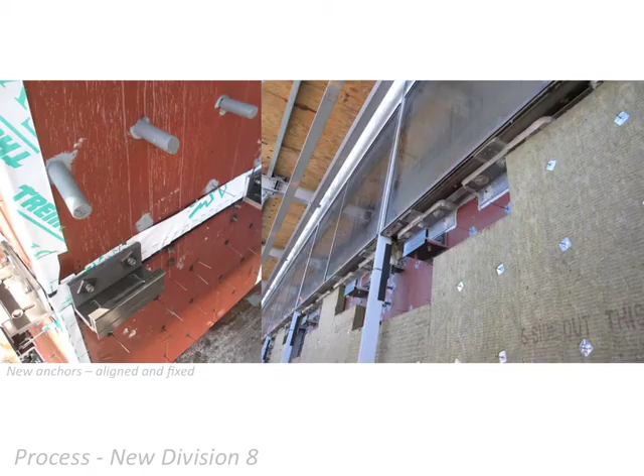So this is the structural level. These get attached all the way up and down the building, and this is us up at about the 60th floor in this image—it feels like you're standing at home. A little windy. And then these are the hang plates that get attached to hang the actual assembly all the way along. The glass gets installed at that point, and then the new trim kits get put on.